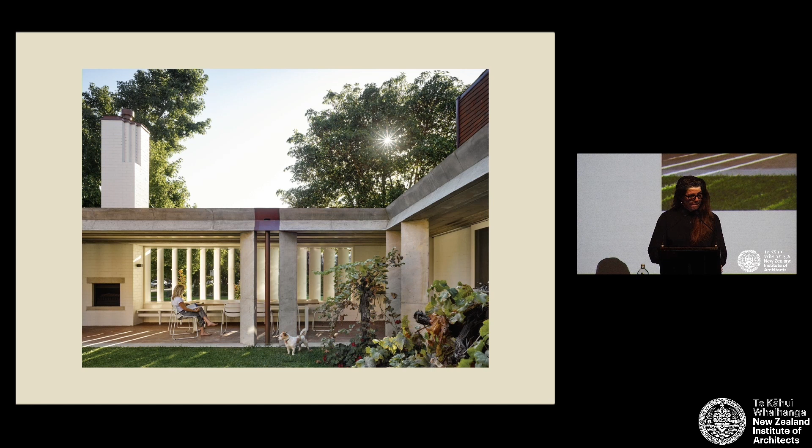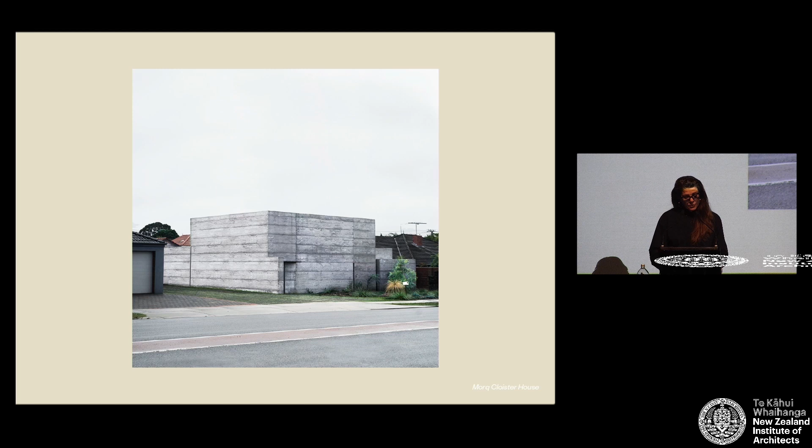And in complete contrast, the Cloister House by MORQ, which I've been lucky enough to visit. While austere and brutal in appearance, it's located on a busy suburban street. The house responds to its context. The client's brief was for a house to retreat, to compensate for their hectic travel schedule. It's an incredibly calming house to be in.

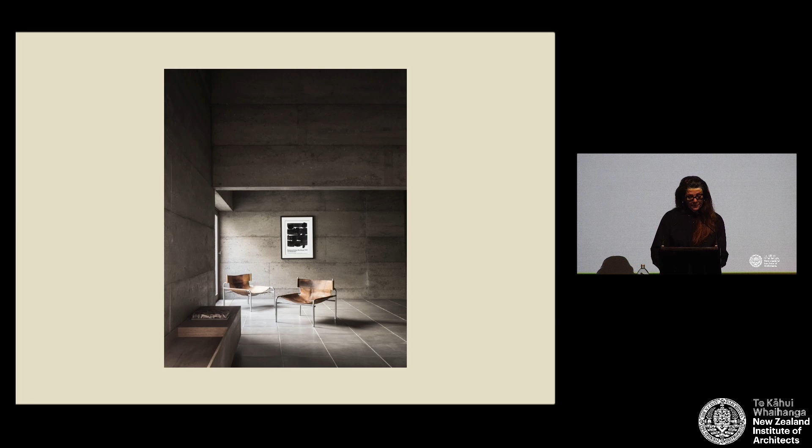So what do these houses say about the people that live in them? And have we been conditioned to live in a certain way? Which house would I prefer to live in? And how do we strike the right balance? This tension is of great interest to me.

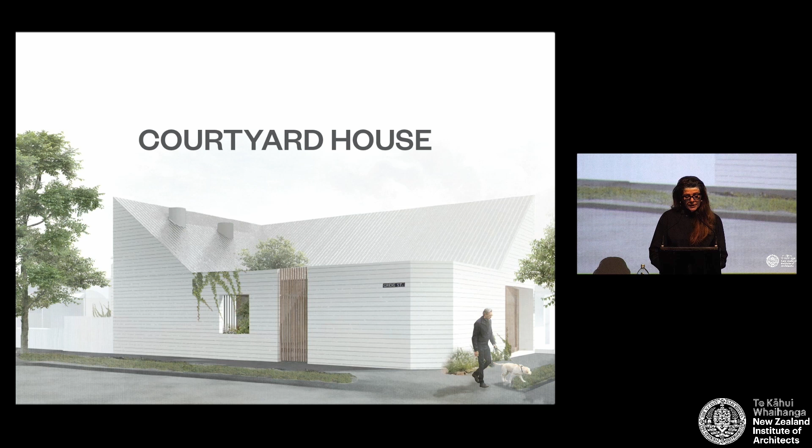One project where we've tested this is our Courtyard House, which is recently finished and only just recently photographed. Located in Albert Park in Boonwurrung country in Melbourne. The existing site had very little private open space, most of which was shaded throughout the day. That's the back.

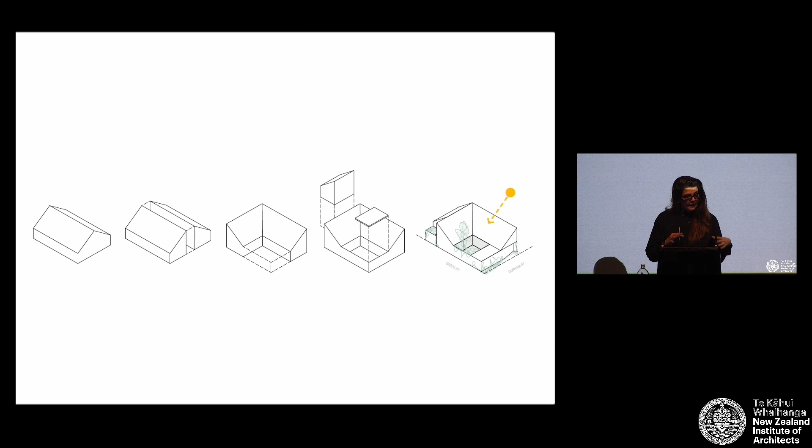So we actually were required to build in a heritage manner to complement the local streetscape. A walled courtyard typology, locating a 40 square metre courtyard, we dissected a gable form typical of surrounding period houses and inverted it to maximise solar access to a garden and the surrounding windows. We basically mapped the site empty and looked at where the only pocket of sunlight was throughout the day, and that was in this central courtyard which really generated that form.

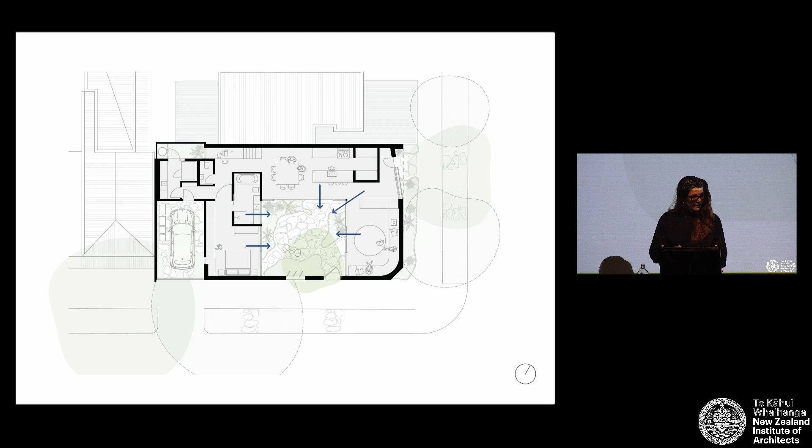And this led to a walled courtyard typology, locating a 40 square metre courtyard in the centre of the site to offer garden outlook from both public and private zones of the house. So that ability to look across and then also look between. You can see there in the centre, actually the shower can essentially look to the kitchen.

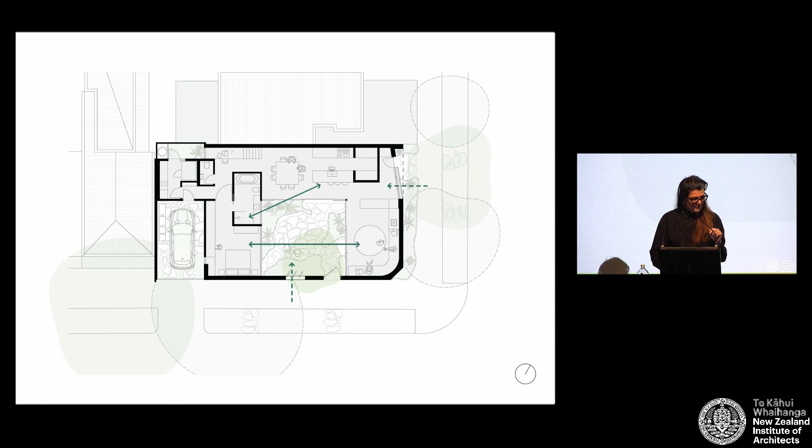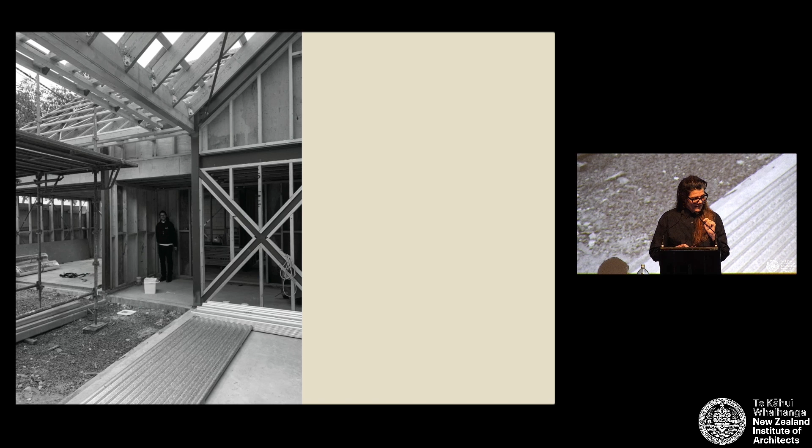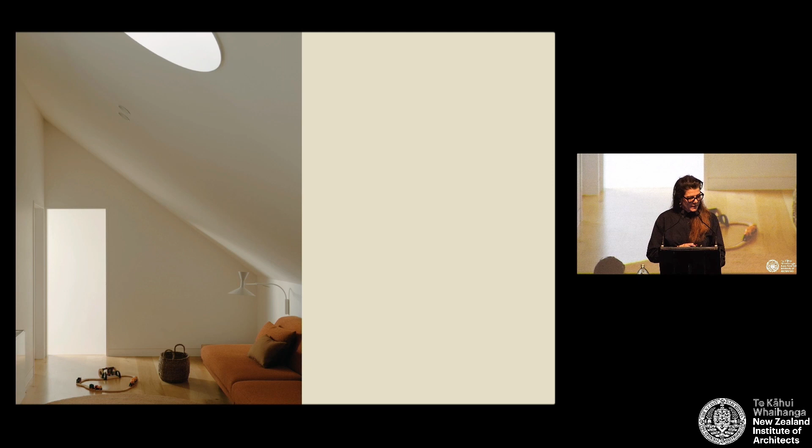And that's the space now. And that's using the roof space as another small living area upstairs. A louvered window aperture offers direct access and connection between the street and the walled garden, allowing the occupants to mediate their degree of connectedness.

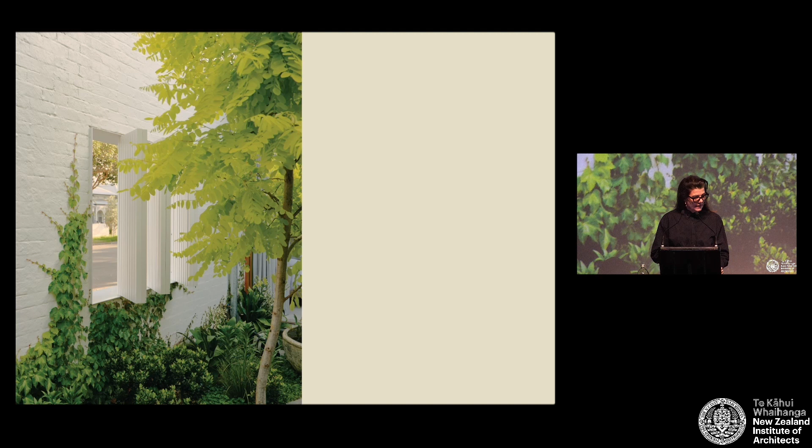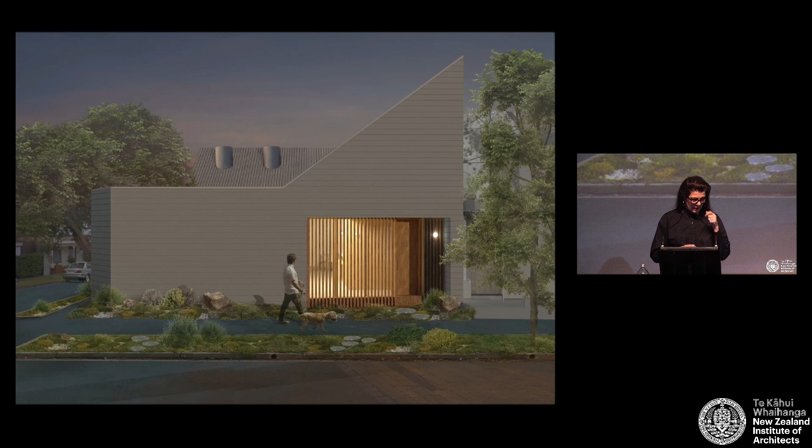And here we were looking at the council's often very interested and obsessed, I'd actually say, with this idea of windows on street, even though we know that people are going to want to put blinds down. So we used a textured glass, but like the way that at night this battened entry could actually have a lantern effect but still be quite private during the day and night.

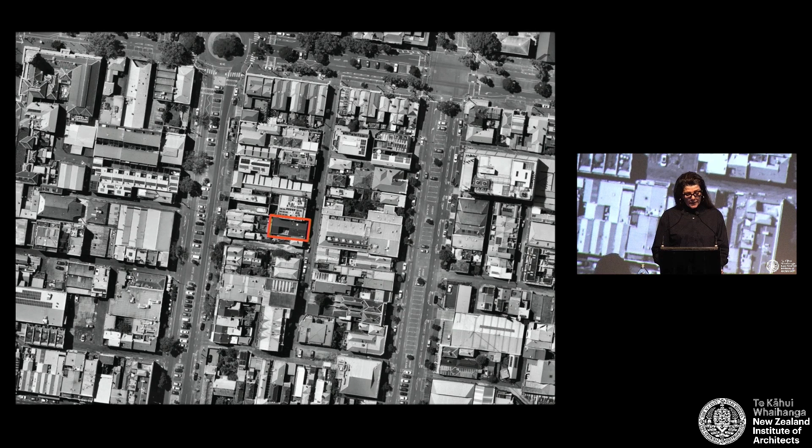Another project, Stable and Cart House, is a sensitive adaptation in North Melbourne and Wurundjeri country, engaging thoughtfully with the imperfections and idiosyncrasies of a 1920s brick warehouse, surrounded by period houses and warehouse buildings.

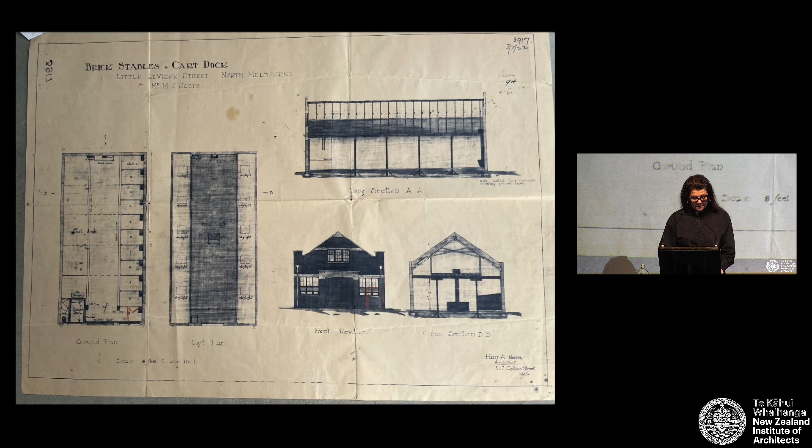Original plans show a series of 10 horse stalls and cart dock, manure bins and large feed loft. Designed by the esteemed architect Harry A. Norris, better known for designing Melbourne's iconic Nicholas Building and Mitchell House, as well as Burnham Beeches.

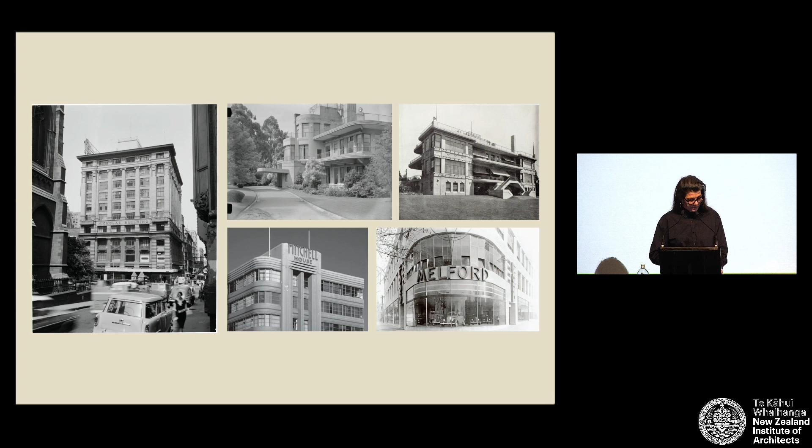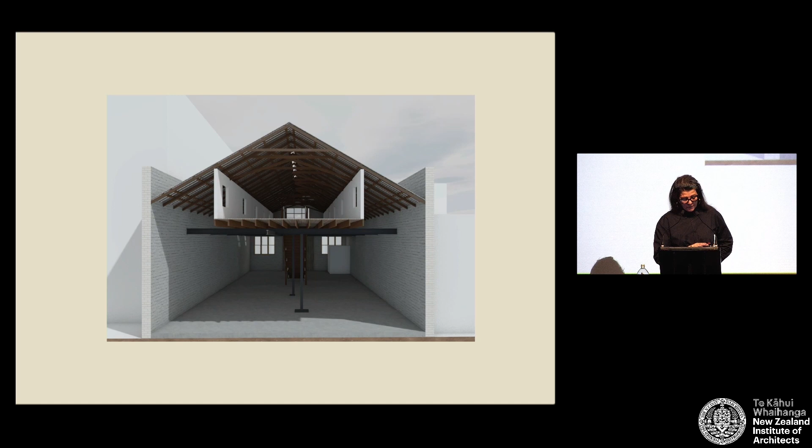The site had many uses over the years, including stable, ironworks, boxmaker, salvage warehouse, and more recently, a dressmaker's studio, where the tenant lived upstairs in what was originally the hayloft. So a model of the interior volume and a section of the existing space.

Having owned the warehouse for 25 years, our client's retirement and relocation from the Blue Mountains was the catalyst to undertake the conversion. It remains an incredibly intact building despite the varied uses over the last 100 years, including the large timber sliding door with its wicket access gate. We were keen to engage with and preserve the rich history of the building's varied uses, all of which have left indelible marks on the building fabric.

Defined by its 4 double-height perimeter walls, the existing stables presented an enclosed singular volume encumbered only by the original feed loft cutting through the central airspace. The overall project strategy was an exercise in restrained removal and repair only where structural integrity required intervention. Industrial patina, aged timbers and rusted corrugated roofing were characteristics of the historic interior to be retained and celebrated.

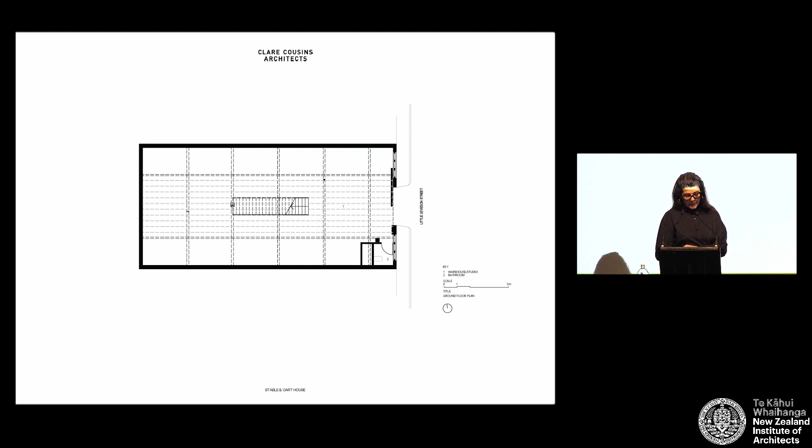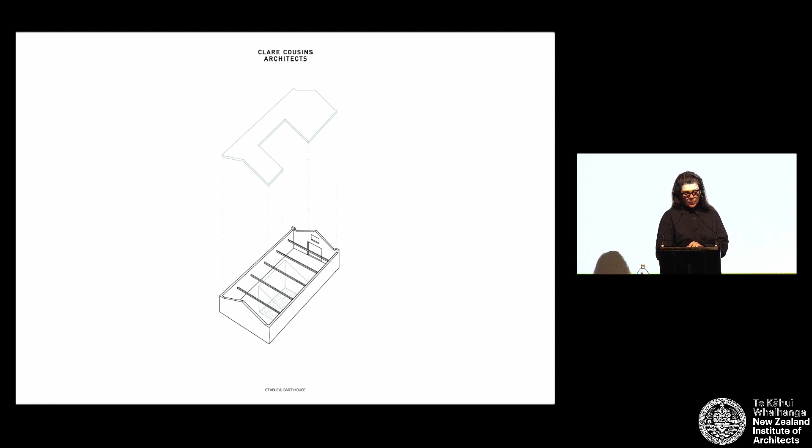So here we have the existing plan. And essentially the idea was to cut a large opening in the roof. Double glazing, operable skylights for thermal purging and cross-ventilation, highly insulated rooms within the larger space worked to combat the thermal limitations of a 100-year-old double brick warehouse.

So here you can see one of the strategies in trying to keep the brick walls. Obviously a double cavity brick wall is not thermally stable, and so we left the slab intact. North Melbourne's renowned for in-ground contamination, so we left that to cap it. We insulated and then poured a new slab and then highly insulated the roof over the top.

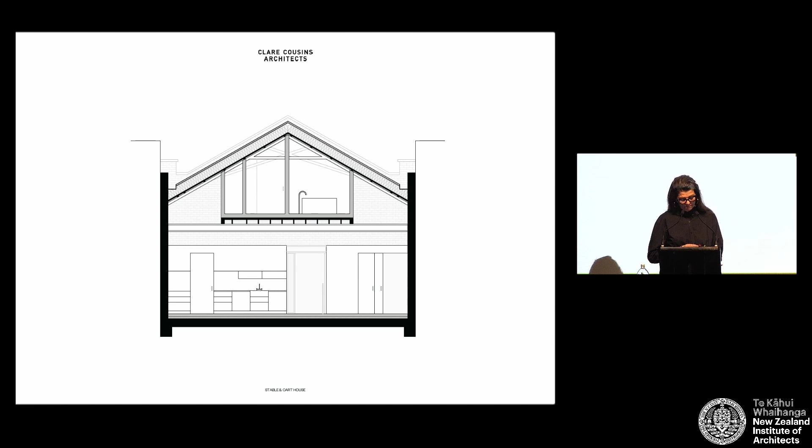So I've just lost my place. There we go.

Internally, the distressed roof is retained as the ceiling with a new highly insulated roof structure inconspicuously constructed above. The timber feed loft was partially removed to expose the full height of the interior, visually liberating the scissor truss and steel beams. Timber was salvaged and reused to complete the upper level construction.

A solitary tree occupies the restrained garden courtyard formed at the centre of the plan by removing a portion of roof, allowing natural light and ventilation to permeate the interior. Here you see the new roof framing. From our shadow study analysis, we located the courtyard on the south to avoid overshadowing by the 4-storey northern neighbour.

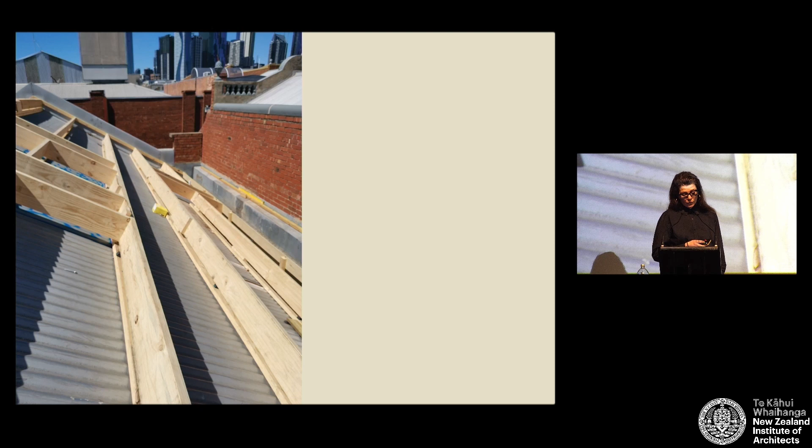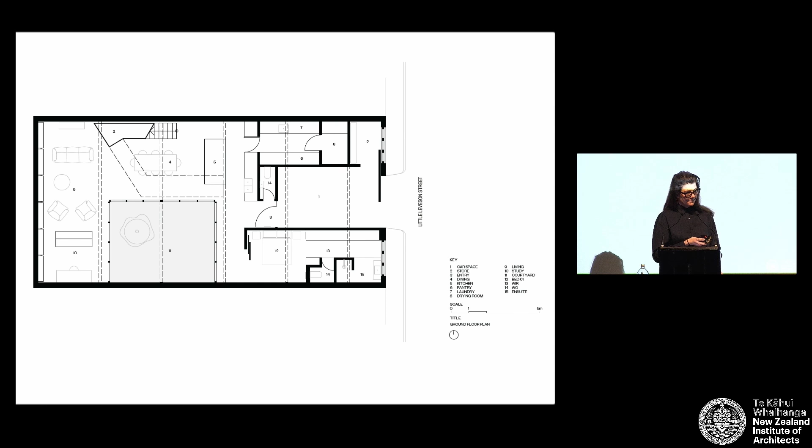The design challenge presented itself as a paradox to introduce the obligatory domestic program while preserving the warehouse scale of the interior and memories of the past. A utility space at the entry allows for off-street parking but doubles as an entry threshold to the home. So here's the plan. So you've got bedroom, kitchen, the entry forecourt which allows a car park. Anyway, it's all fairly self-explanatory to architects in the room.

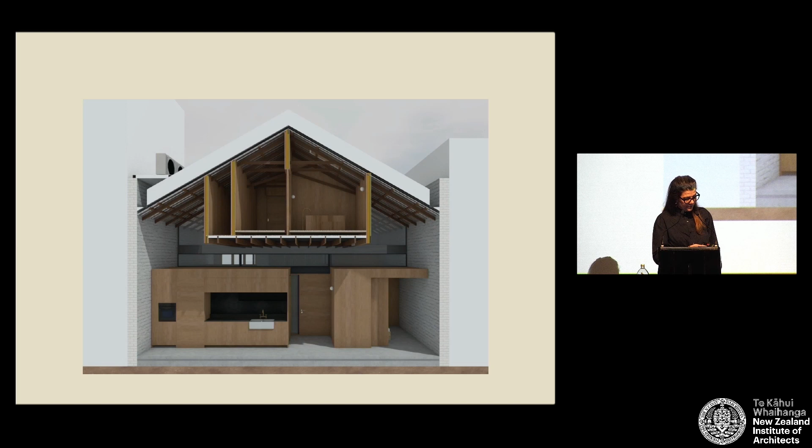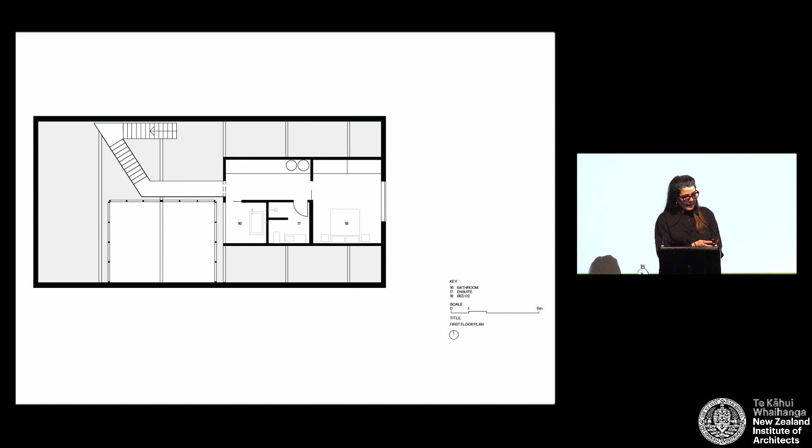So domestic zoning occurs around the courtyard with the insertion of rich blackbutt clad rooms, primarily containing spaces for utility or those that require privacy. And here the sliding doors of the bedroom, which allow it to open up to the courtyard or be more contained. And here the first floor, which has another bedroom, a bathroom and a bathhouse.

Timber-lined bathhouse explores opportunities for spatial connection. The blackbutt battened balustrade, which is just out of camera, allows occupants to engage or retreat from the courtyard below. The stairs' rust-toned hue rhymes with the patina of the rugged surrounding surfaces.

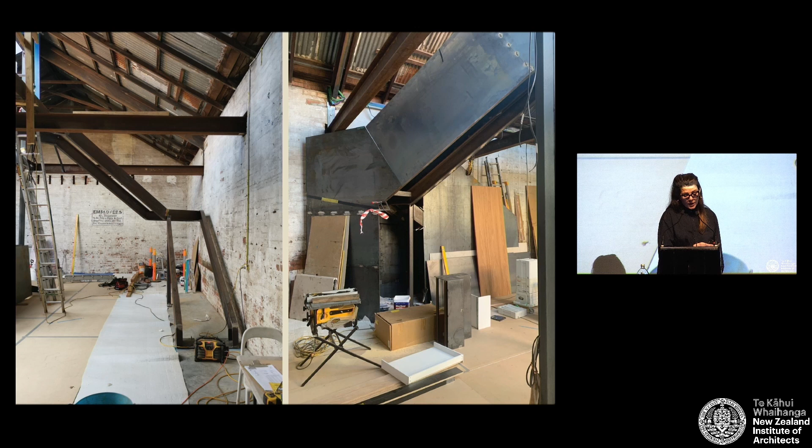So here's the construction. The steel worker did a fantastic job. But it is clearly expressed as a new element within the interior. It goes beyond its utility, playfully engaging with existing structural members.

Sorry, having clicker problems.

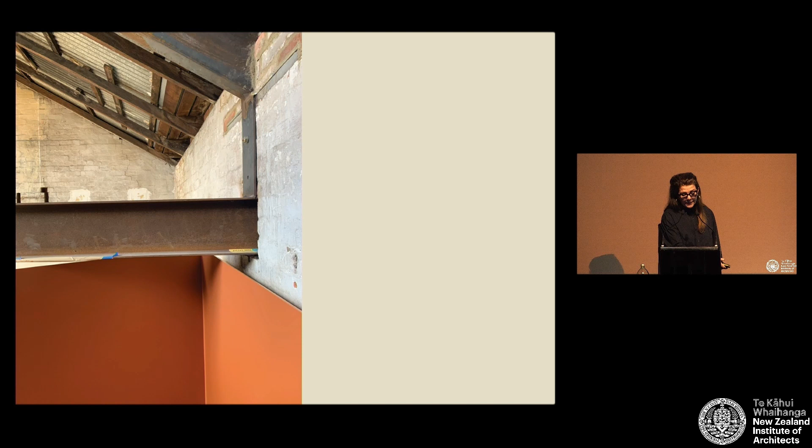Providing opportunities for elevated vantage points and dividing the expansive living space into more intimate spaces.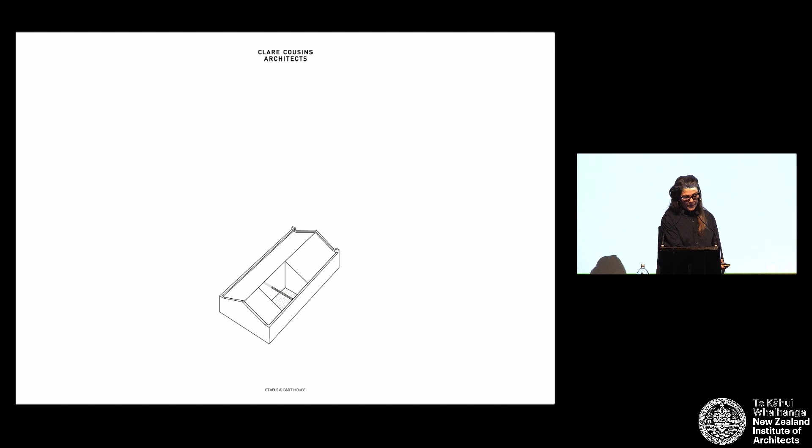Our objective was to maintain the atmosphere of the original place as a humble alteration that values the past, preserving it for the future for its occupants and the context within which it sits.

So our next project. I suppose we really delight in finding solutions to clients' needs, and I think we're always more interested in unusual projects, and perhaps ones with more constraints, because we find them more of an ability to leverage, or I suppose a departure point from which to find the solution and a design.

So this client bought the site in Dromana, which is in the Mornington Peninsula on Boonwurrung country, as she loved the view. However, daily use of a wheelchair makes living on a hill more difficult. The house explores how she can enjoy the landscape from various vantage points.

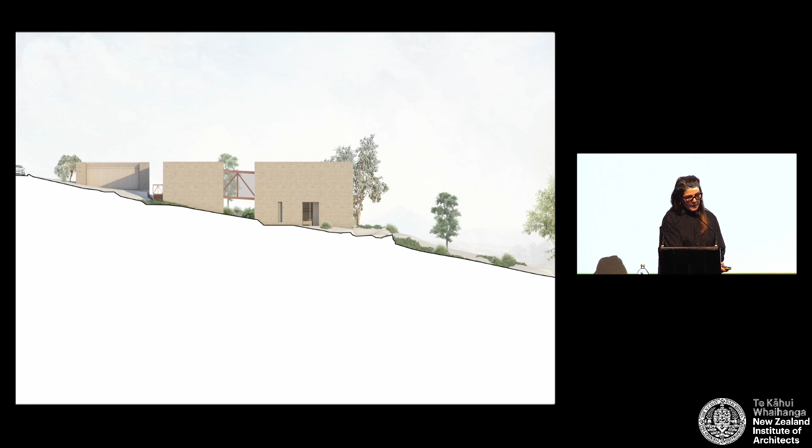There are 3 pavilions connected via a steel pink entry ramp and a bridge, inspired by the many shades of pink in Sedum Autumn Joy. She was obsessed with pink, and that was not my favourite colour, so we had to find a way of bringing that colour in.

So here, highlighted in pink, that's the entry ramp, and then there's this pink bridge that connects the various pavilions, north being to the right of the page.

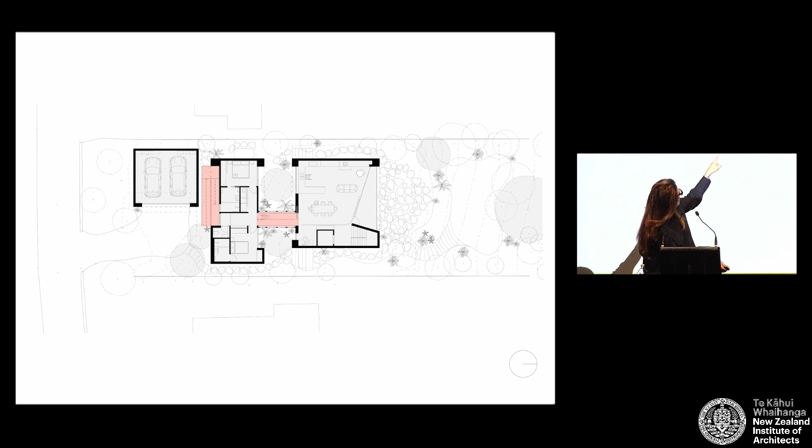In the house, curtains are used throughout as a device to screen utility zones like the laundry, robe, study and lift. So it's a little hard to see, but going into her bedroom there's actually the laundry. So we tried to avoid having designated rooms and used curtains as devices to screen off elements.

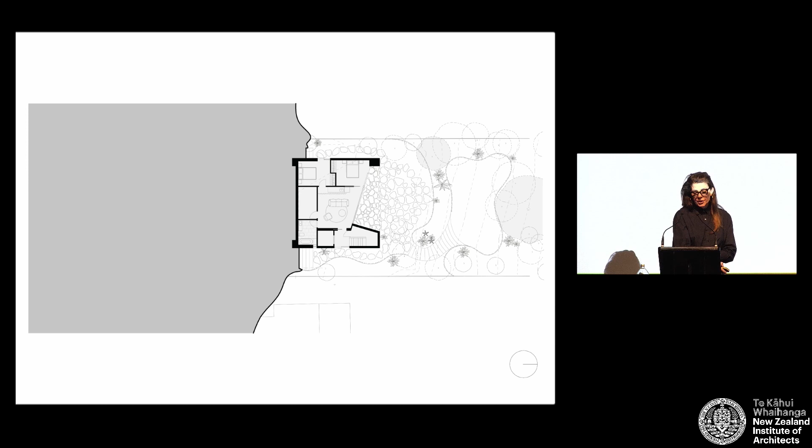And below, on the lower level, the house will accommodate 3 generations of women, with the ability to sublet the lower level as a separate apartment in the future for passive income. We design spaces to enable as much independence as possible. The kitchen has a wheelchair turning circle and knee clearances in work zones.

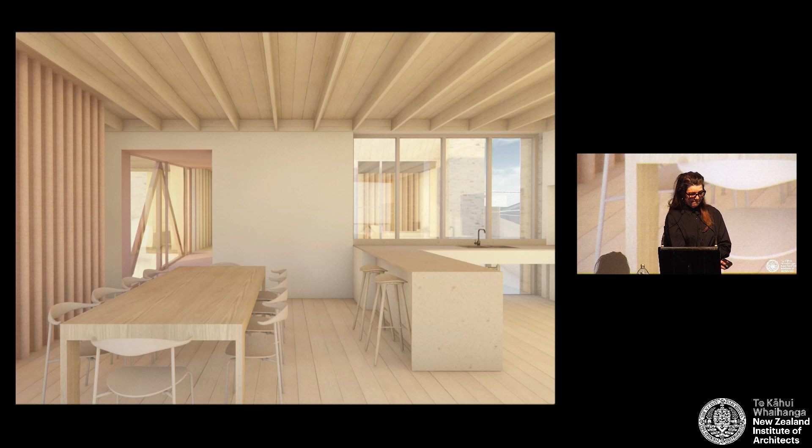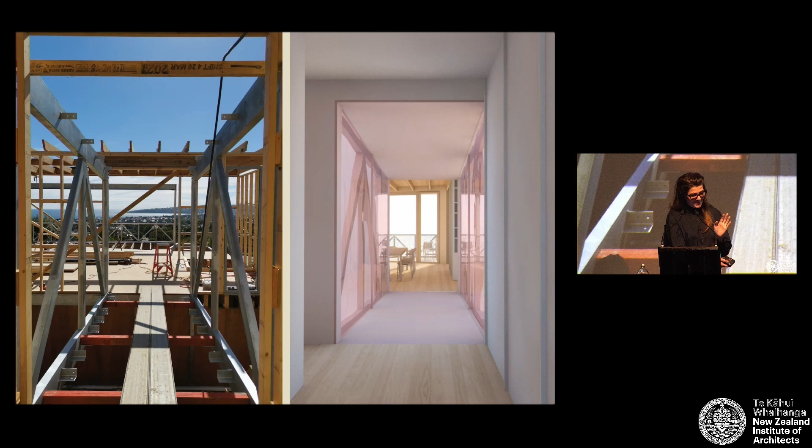So we really enjoy projects where we can make a difference, and we're currently delivering a specialist disability apartment building for residents with high physical needs in this project in Altona. The project will include a ground floor cafe, a social enterprise providing vocational training and support for the long-term unemployed and young people with a disability, as well as a communal rooftop for therapeutic horticulture.

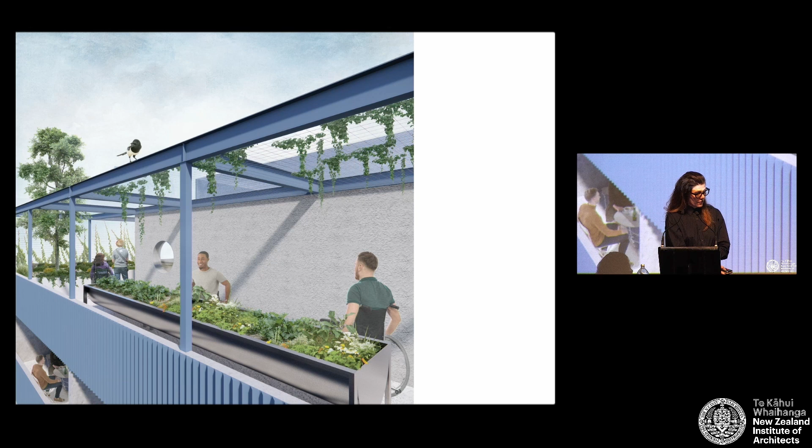We're also underway with a social housing project in Bendigo in regional Victoria, delivering 35 independent living units for Wintringham, a community housing provider who specialise in care for over 50s who are homeless or at risk. So this is on a large 7,000 square metre site, so it's all quite low density.

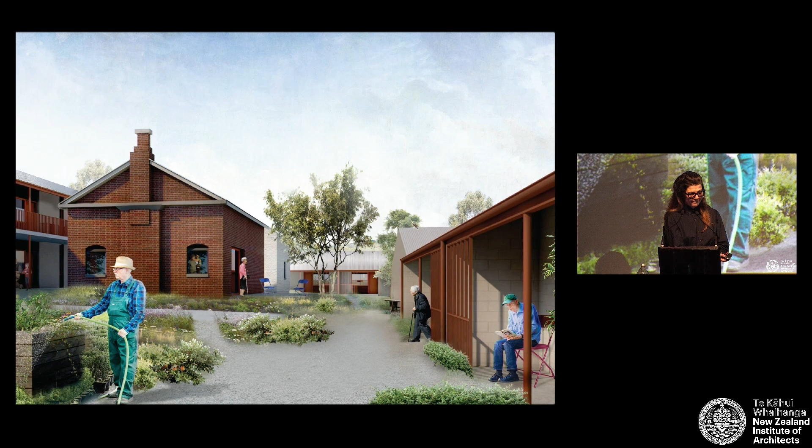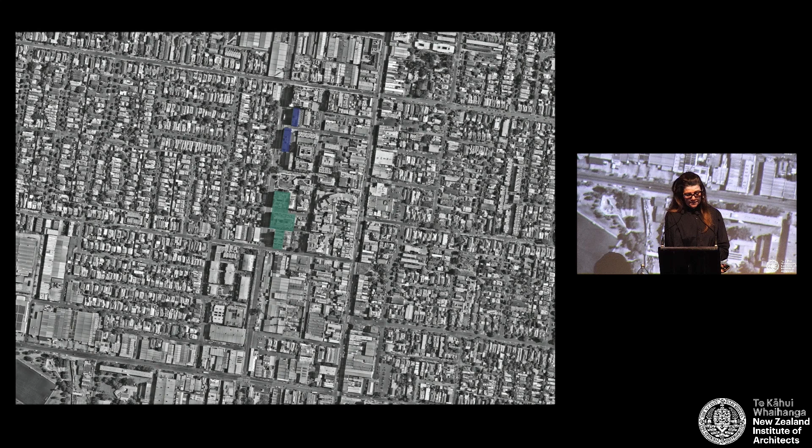And Nightingale Village. The site is in Brunswick on Wurundjeri country. It's located to the south of the Commons, which is there in the darker blue, Nightingale 1, Nightingale Anstey, and Nightingale North Walls, so it's really part of a precinct transformation. The site is bounded by the Upfield train line and the bike path to the west, low residential on either side of the tracks, and then a commercial strip on Sydney Road to the east.

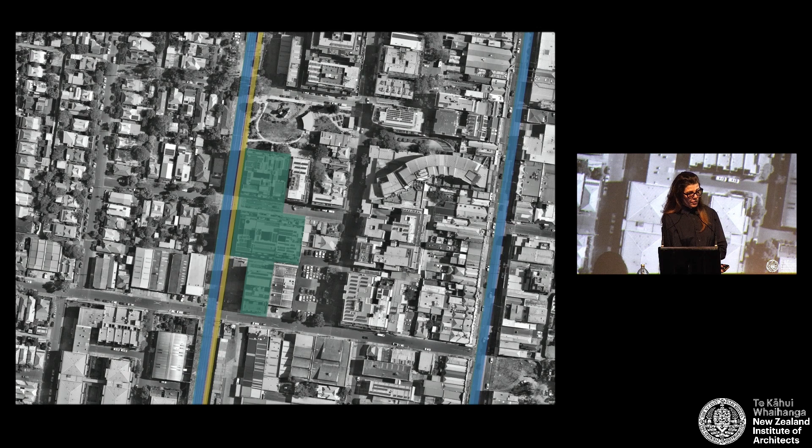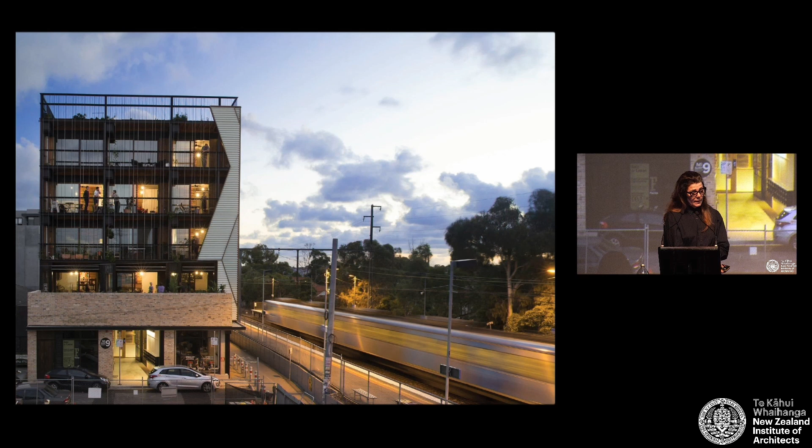This pocket of Brunswick has seen rapid densification over the past decade, and very little of it is desirable. In 2014, Breathe Architecture completed the Commons, which then led to Nightingale 1. Austin Maynard Architecture and our practice, CCA, amongst others, were silent investors in Nightingale 1, keen to support a necessary shift in the multi-residential offering in Melbourne.

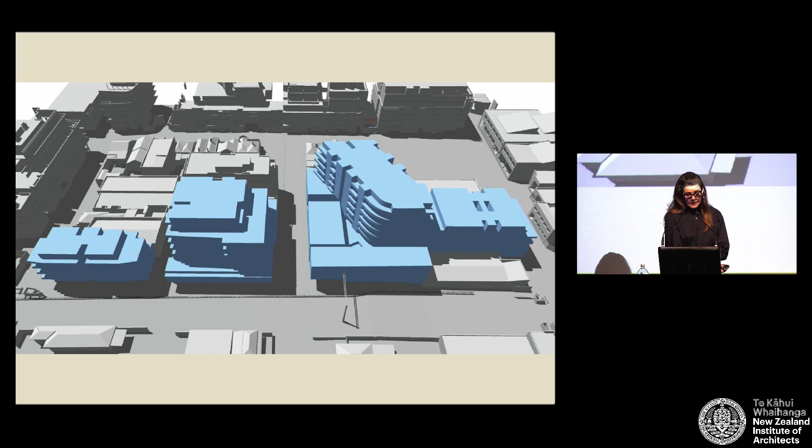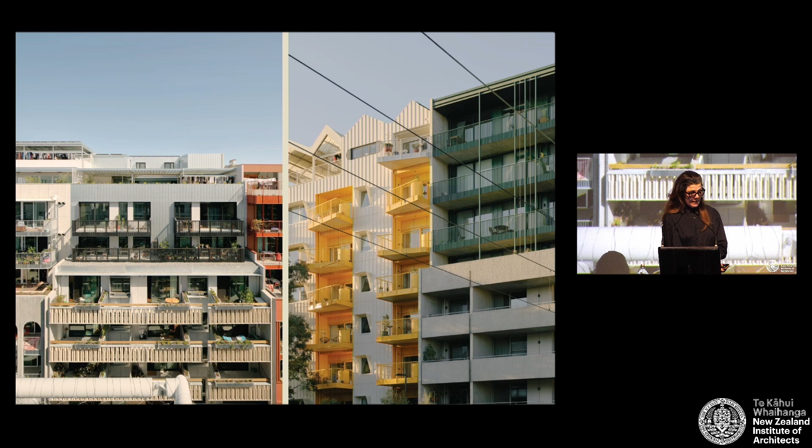This is Duckett Street, our site, a collection of single-storey light industrial warehouses across 12 titles. And this was the scheme that had planning permission that the original owner was proposing to build. However, Nightingale was an opportunity to deliver a truly diverse, fine-grained housing project, a village collaboration by many hands. And here are the 7 practices involved.

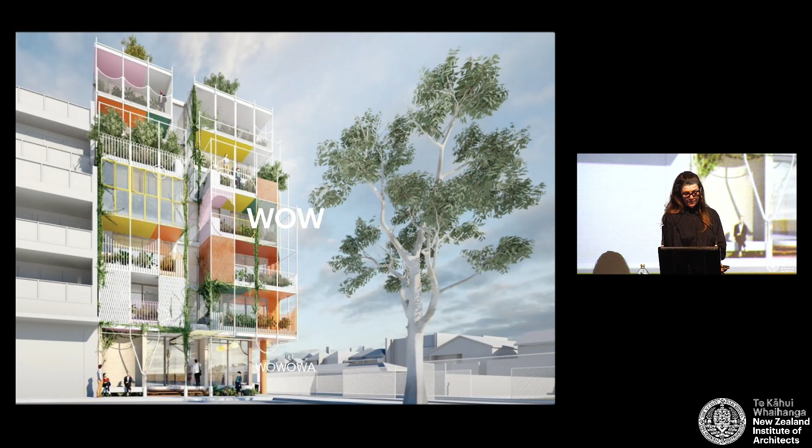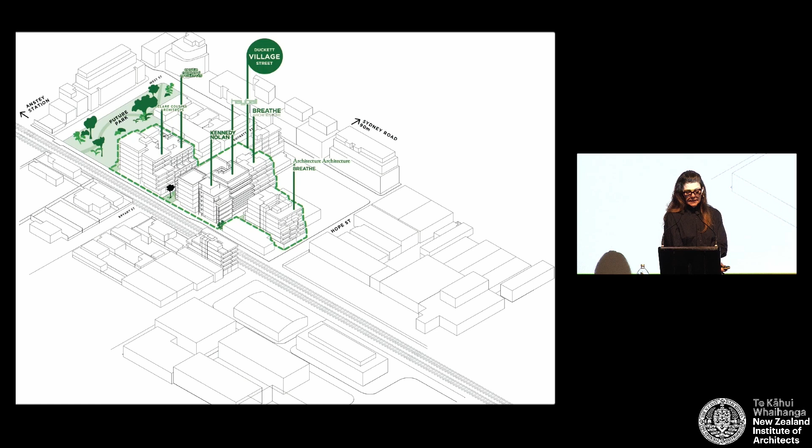So this is the site and each of the buildings. As well as design architect, each practice was the developer for their project. And I think that's another whole separate lecture and learning that I could talk about.

Collaboration, though, was an important aspect of the project. And really, I think Nightingale Village is far more than the sum of its parts. The 6 firms worked closely together, established practices mentoring emerging practices. Not that I felt that we were emerging, but we hadn't actually designed a multi-residential project before. There was energy and ideas coming the other way.

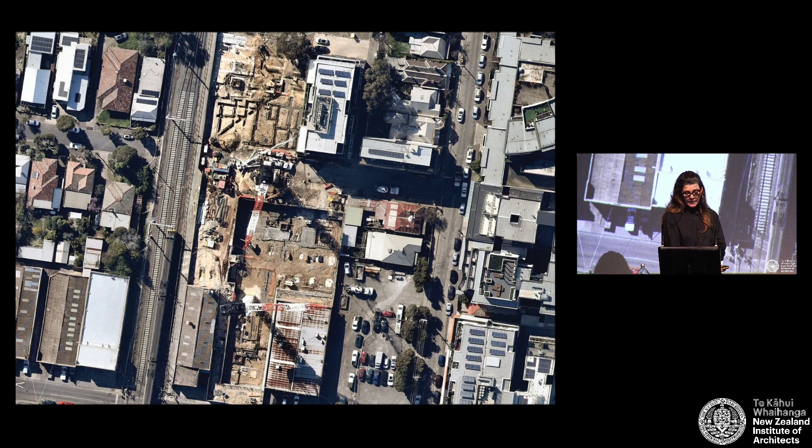Collaboration also took the form of peer reviews involving all practices in the design phases, resulting in shared knowledge, but also architectural outcomes, such as the shared light court between Evergreen and Parklife, which provides such great amenity to those buildings. Collaboration was also evident in the delivery methodology: 1 drawing set from our documenting architect, 1 contract and 1 builder.

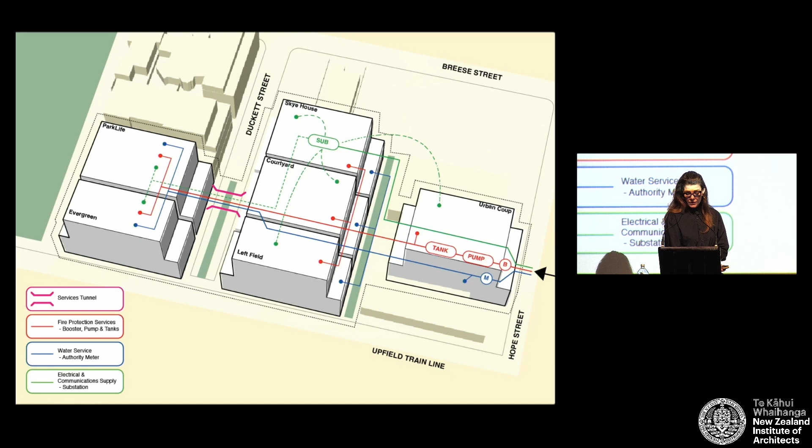The efficiency of this cooperation had concrete expression in the shared services and facilities. A single substation and car park, trenching between sites. We acquired and purchased below ground land for $300,000 so that we could share trench services across the street, all of which allowed the facades to be freed up for maximum activation, as highlighted here.

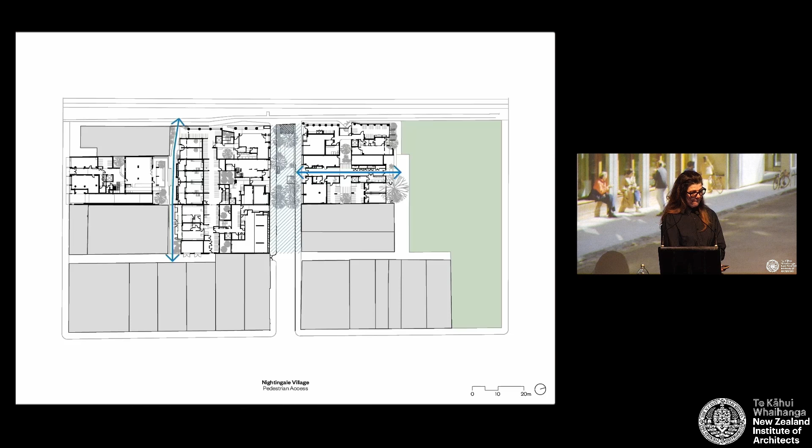Pedestrian access. Duckett Street, through extensive consultation with Moreland Council and designed with Openwork, the village was able to pedestrianise most of Duckett Street for the benefit of the broader community, that hatched area. Each building set back from their title boundary to create a new local pedestrian laneway we call the Southern Mews. So you can see where the title boundary actually would have sat. And the internal lane within Parklife connecting Duckett Street and the park on ground floor.

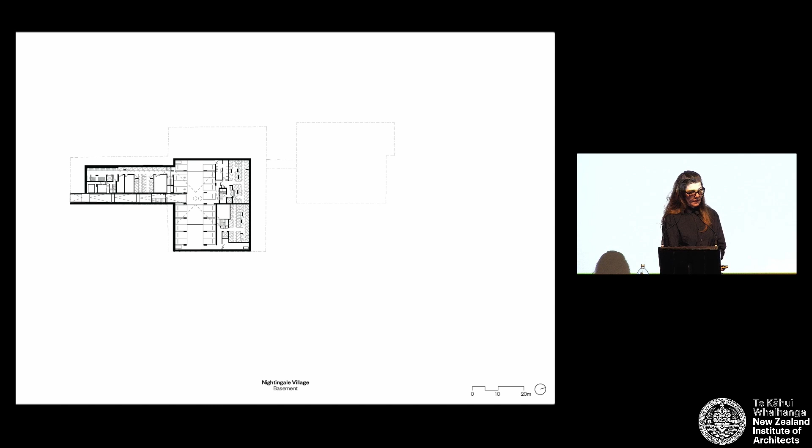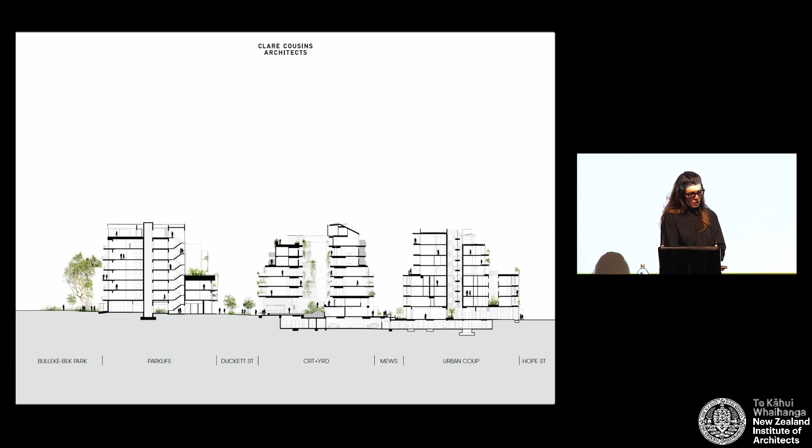Here shows our extensive ground plane vegetation, and here off Hope Street, the busiest street, which is the access to the basement below, which has 14 share cars, GoGet, which is a car share company that the broader community can access, not just the people living in the village. Highlighted places to stop for incidental interaction within the building fabric and Duckett Street.

Setting back from the edge of the Upfield bike path to define a more generous relationship with buildings and the path, as well as provide opportunities for pedestrian refuge, pause points and greening. Those building columns too, I should say, were also needed to protect the buildings in the event of train derailment. So we were dealing with a whole lot of interesting issues, as well as a $250 million public liability policy we had to take out, building next to the train lines.

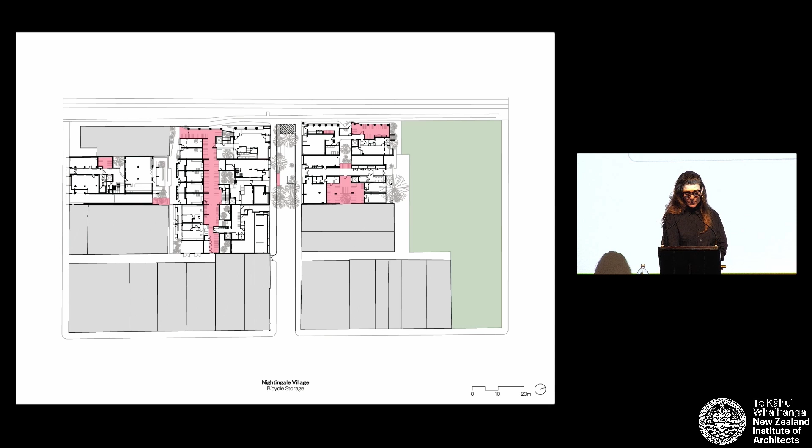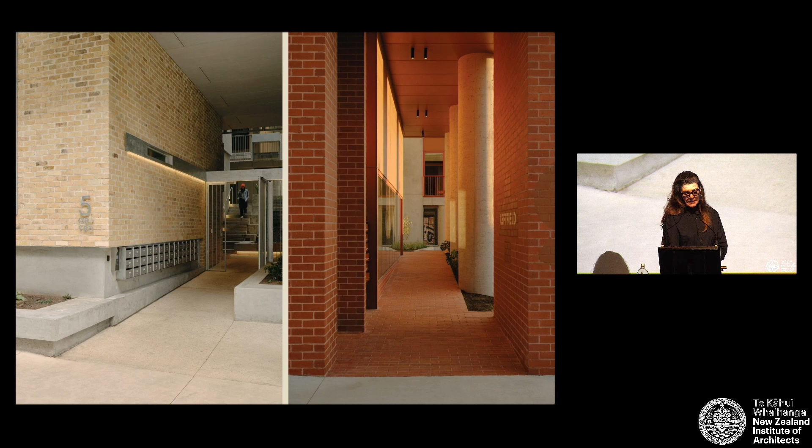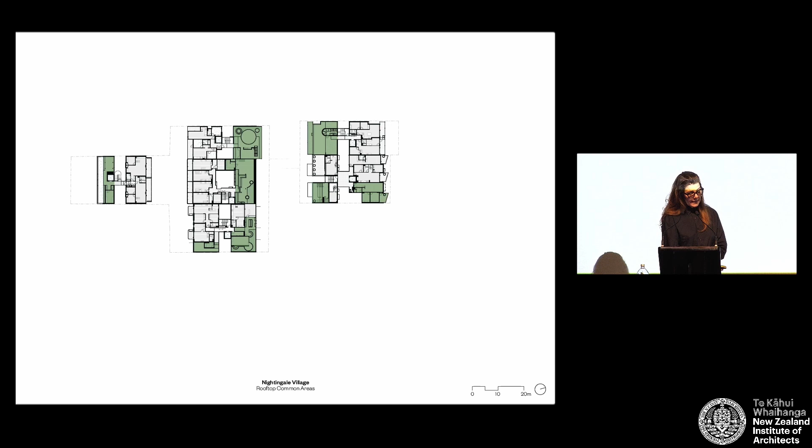And there's 470 bikes across the village, some of the bike parking within Parklife. Vertical circulation is located at the edge of the buildings to maximise natural light and ventilation and encourage use. Despite the single documenter and builder, each building has a distinct identity and character, an essential aspect in establishing the 6 individual Nightingale communities. This is especially evident in the various entries and lobbies to the buildings, seen on every edge.

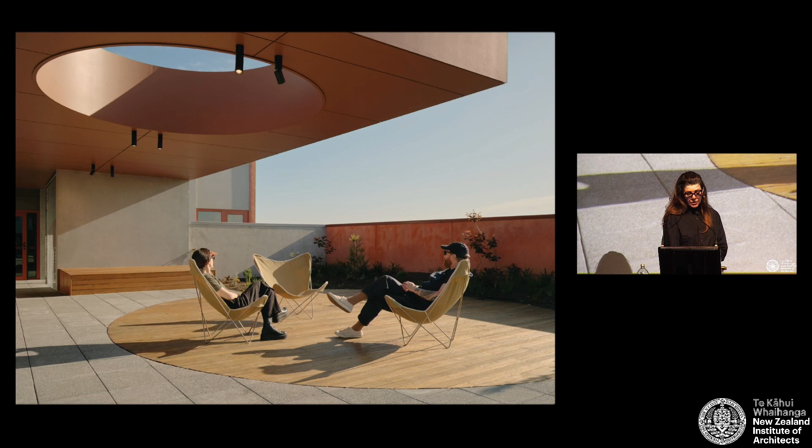Landscape and rooftop gardens were critical, designed by different landscapers, Openwork, Eckersley Garden Architecture and Amanda Oliver. Places for introverts and extroverts, groups, individuals and pets. Spaces for recreation and somewhere to dry the washing adjacent to rooftop communal laundries in each building.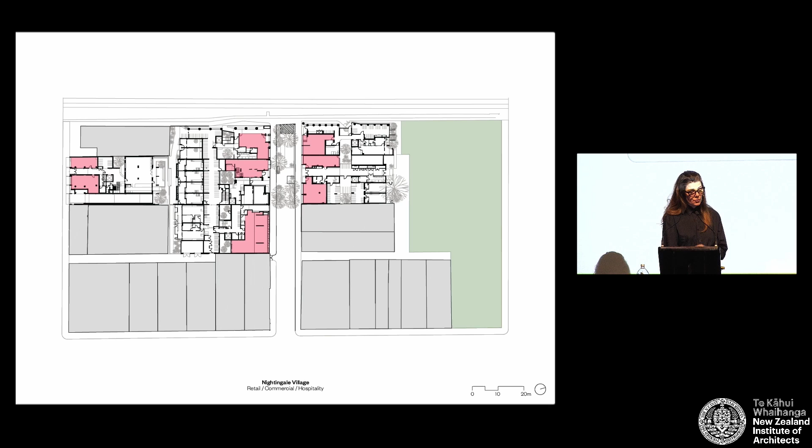And then we have 8 commercial tenancies which were curated, as in the tenants were curated and purchasers, located on the ground floor. Curated to ensure that they benefited the village and the broader local community. In the bottom of ours, a group of residents actually got together and bought the tenancy so that they could rent it at below market rate to a social enterprise, which is a bike repair. There's a florist, there's a little Japanese grocer, there's a psychologist, and it's been a really great groundswell.

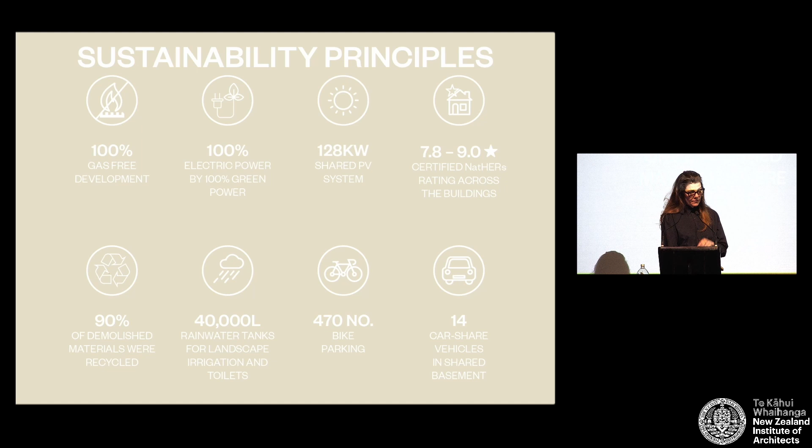So the sustainability was an enormous part of the initiatives, and again, I won't go into it in too much detail, but key things: zero gas, 100% green power, large solar arrays, embedded networks, energy recovery systems, no air conditioning, although some apartments do have that. Some of the community housing providers need mechanical systems, and the car share as it goes on.

Social housing. This is Val in Evergreen, in our building. 27 of the apartments were pre-sold to community housing providers, Housing Choices Australia and Women's Property Initiatives. And these were blind integration, building seamless, cohesive communities within the village.

Building and nurturing community is a core value in Nightingale. The resident groups of each building were formed before construction even began and started to form supportive networks, friendships, respect and kinship. The architecture fosters connection, spontaneous interaction, and the self-selecting groups tend to share values and priorities. The buildings are quite raw and encourage resident expression through gardening, furnishings and activities. Importantly, the communities are comprised of people of all ages and diverse family units, reflecting the reality of our wider community.

So, apartment types. Nightingale Housing, which was, I suppose, the organisation that we all sought our licences from, and they also ran the balloting system when we were selling the apartments. They were nervous about us including 3-bedroom apartments, and we were adamant that that was what we wanted to do because most of our work was doing family homes. Urban Coup, which is more of a co-housing project, already had an existing population of residents that had come together and were looking for a site for a long time, so they also include 4-bedroom apartments.

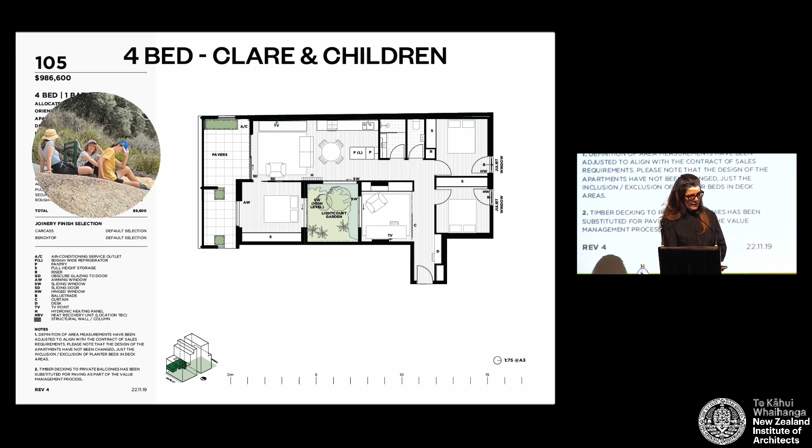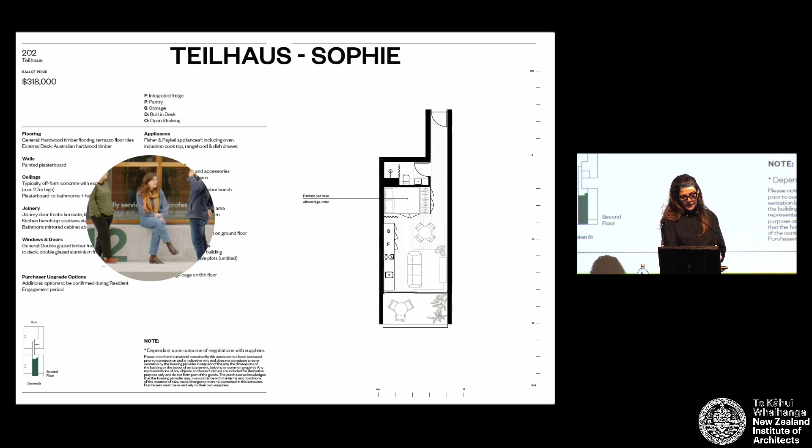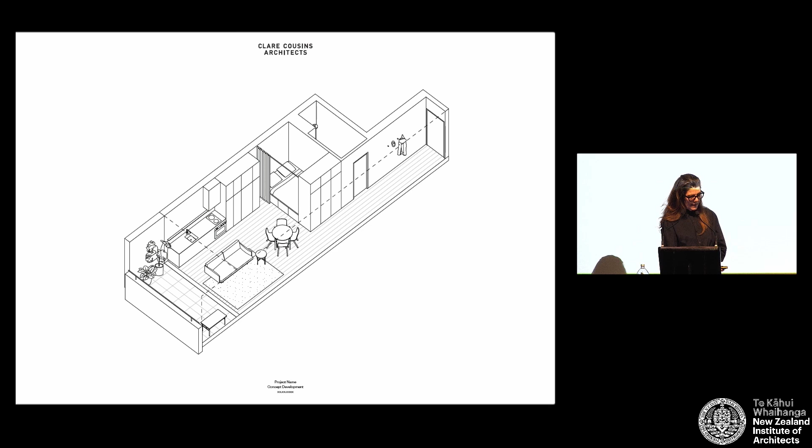So here, Clare and her children. There's a 3-bedroom. Rowan and Alyssa's 2-bedroom. There's a 1-bedroom. And then we also have Teilhaus, which is a studio apartment ranged between 25 and 35 square metres, which was sold for around $300,000, aimed for first home buyers. So this is ours, Sophie and Cam. We had 2 in our building, and they've proved to be very successful. So building the bed in that can be opened and closed up.

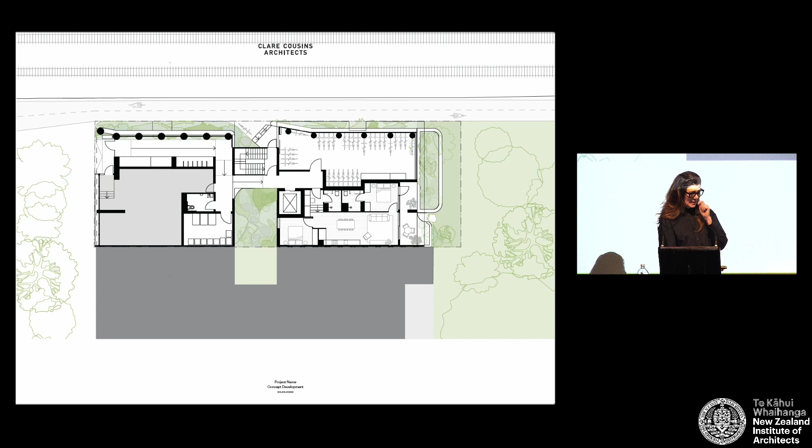There are 6 buildings with 6 distinct architectural sensibilities and imperatives. So I thought I would include some short summations in the architect's own words. Evergreen is our building. I thought I'd just take you through some of the plans before I go through the words. So ground floor, we have our own bike store, the commercial tenancy. We've got 27 apartments. That's our level 6 rooftop. And then the communal laundry, the drying yard and little veggie garden. But for us, Evergreen was a framework for a community to flourish. A neighbour, a connection, a garden, a home.

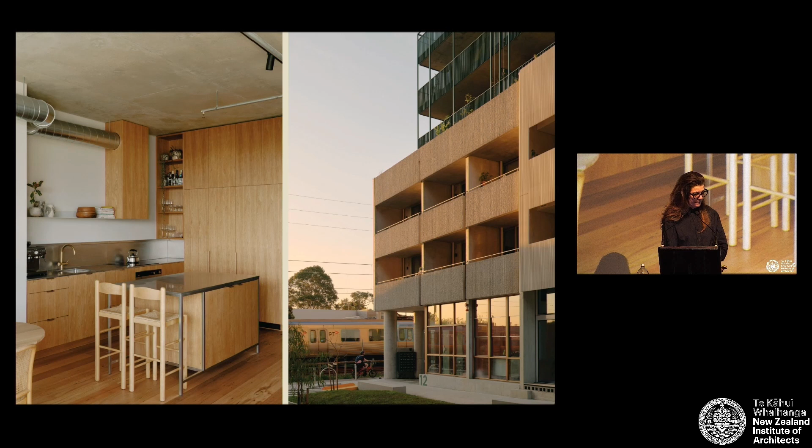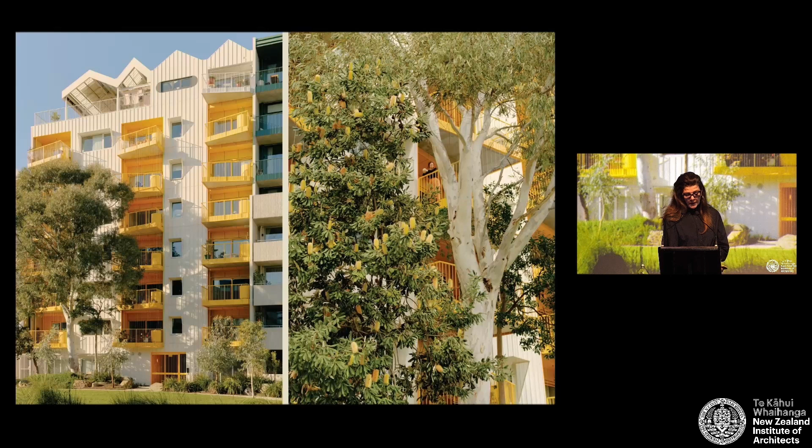Park Life by Austin Maynard Architects. With its distinctive mountainous roof line and a unique rooftop amphitheatre, Park Life is a community-focused building with a variety of social and communal areas that achieve an energy rating of 9 stars. Left Field. For Kennedy Nolan, their Nightingale was an exercise in providing the quality and domestic comfort of a single residential project for their residents using colour, texture, intensity, playful form, and an Amanda Oliver garden.

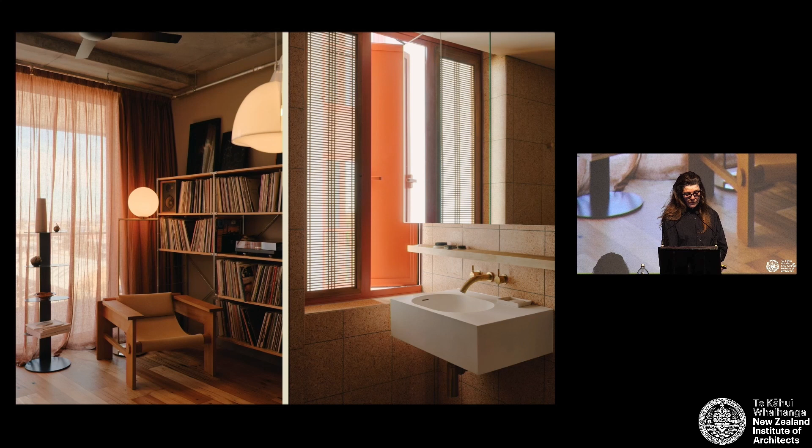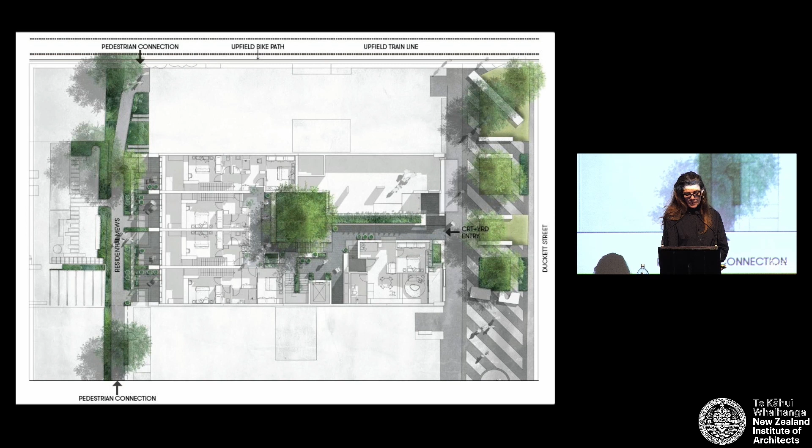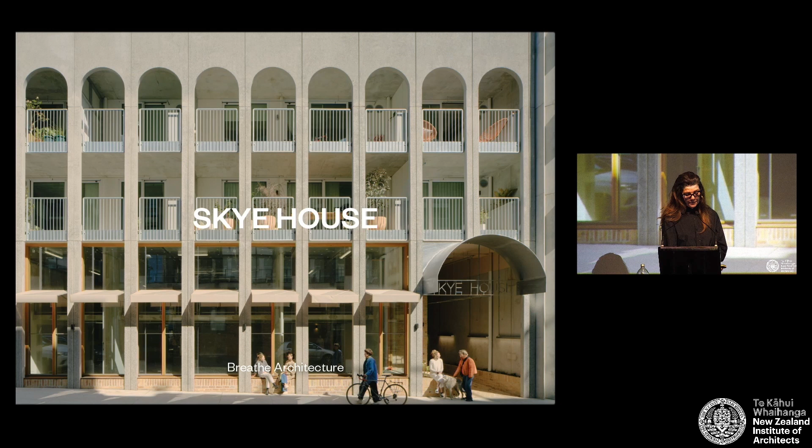Courtyard by Hayball is designed from the inside out. The thoughtfully landscaped central courtyard gives the building its name and provides the formal mechanism to achieve a heightened sense of community, foster visual connection, abundant natural light and ventilation between all apartments. Skye House by Breathe. Skye House is a study in efficiency, material simplicity, small footprint living and affordability.

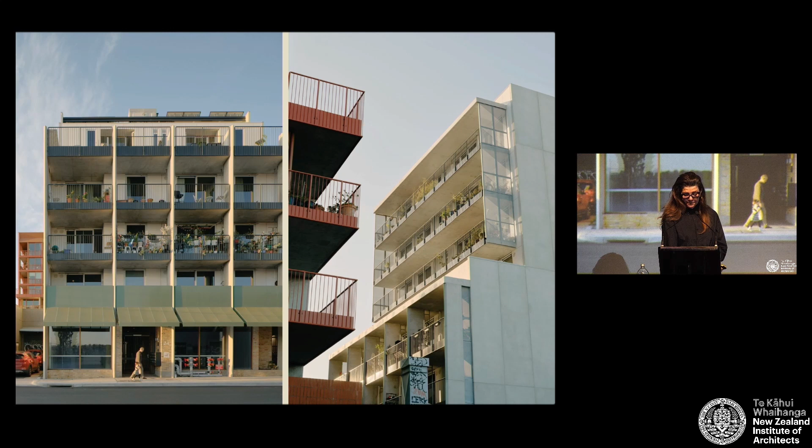Urban Coup by Architecture and Breathe. Urban Coup were a pre-established group wishing to live as an intentional community with shared facilities to support the desire to live with common purpose. So these are their apartments. This is the first vertical co-housing community of its kind in Australia. They've got a large downstairs communal kitchen and lounge where they have, I think, fortnightly Friday night dinners. They've got a music room, workshop, so they had a lot more communal spaces within their building.

So there's much to say about this project and how challenging it was to deliver as an architect, especially as the developers. We embarked on this brave and substantial undertaking to effect positive change in what is a contentious market, and it seems to have had a discernible effect. We hope to deliver an authentic piece of city making, but now we have handed it over to the residents who are making it their home.